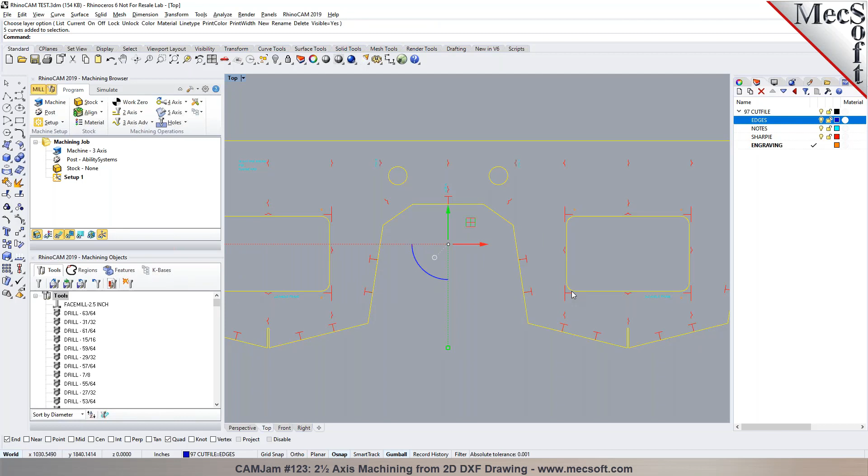I know people do like to center a tool path with offsets, and this is what the part needs to look like. So we have inside cuts and outside cuts only, and then we have the Sharpie lines.

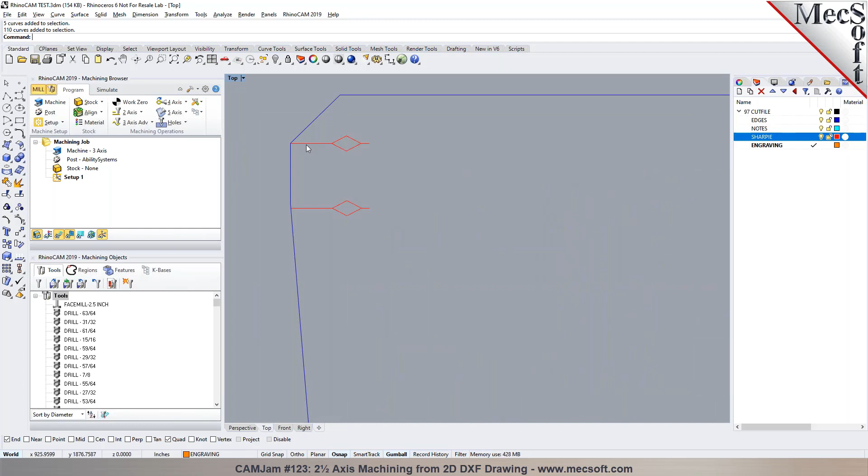I'm just hiding our GoToMeeting thing so I can see your screen here. So the Sharpie lines, those are what we actually do with a marker. That is a center tool path, lines that are drawn on there, or notations used on the shop floor that we draw on with a marker. And then the X is also drawn in with a marker.

You mean the engraving you're talking about right here? No, under notes. Okay, let me go to notes. Let me select the objects here. The cyan objects will actually be written in with the marker as well.

And then the engraving is just — Dakota, you could probably tell a little bit more about the depth of the tool used for that, but that's just a line, a circle that would be engraved into the plate. How deep do you...

It's just a 90-degree engraver at 0.015 depth. Okay, perfect, makes sense.

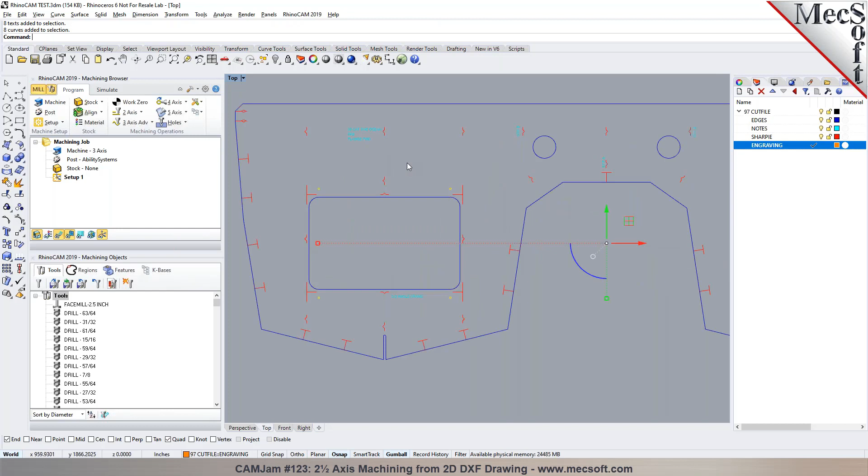So most of this would be like 2-axis or 2D milling, or 2.5-axis machining operations on this particular file, from what I can tell here. So all of our configurations offer 2-axis milling.

For parts similar to these, you can do a lot of automation. We have a feature called knowledge base, where we can save the entire workflow of operations to a knowledge base, and it can program it. You can set up rules even to automatically have the geometry selected for machining as well. I'll go through that as we go through the demo here. That's offered right from the standard configuration of our product, the knowledge base functionality.

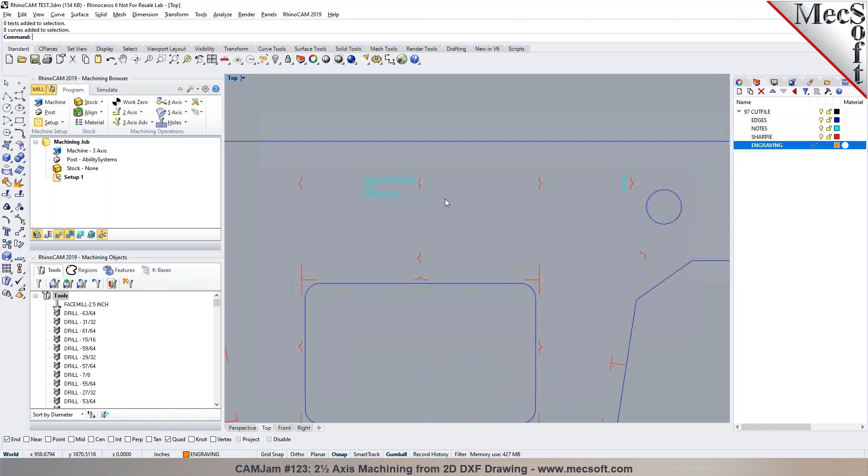So let's see how we'll go ahead and program this part in here. The first step is to go ahead and establish the XYZ orientation and where the origin is. If you take a look at the drawing here, it's somewhere way out in space right here, and your origin is right over here. You see that, sir?

So we want to get the part moved close to the origin. Also, you have some of these defined as text in here. You can see it's defined as text in Rhino as opposed to being vector geometry. So if you want to engrave them, you would need to convert them to vector geometry.

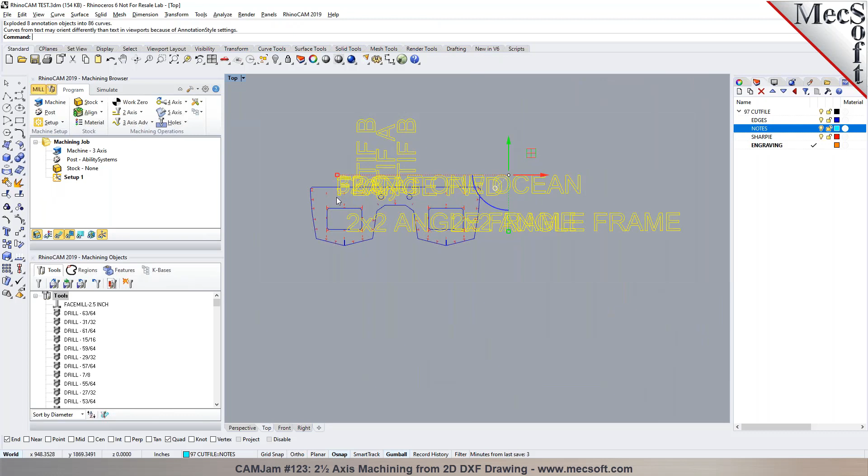So you can go ahead and click on notes, right click and say select objects. It'll pick all of them. And if you just do an explode command in Rhino, you'll notice it'll convert them to vectors. You see that right there? But it looks like there's some sort of an issue with the conversion itself.

Now, are these supposed to be in inches or millimeters? Do you know the drawing? That should all be in inches. Okay, so it looks like there's some sort of a scaling issue, or in the way this was created.

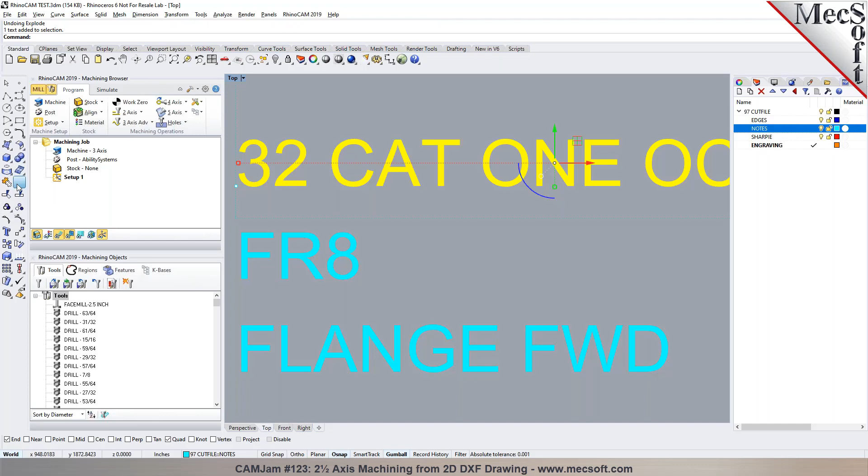So we may have to convert these to vectors and scale them down, because typically in Rhino, when you explode it, it should stay with the same height and letters text that you have. You can see when I explode it here, it kind of scales up right there. Yeah, I think I know why that is, but we can deal with that later. Okay, so you need to have it vectorized to be able to engrave, just letting you know.

So now let's go ahead and get these parts set up for machining. The first step is going into the RhinoCam machining browser. So when you go to RhinoCam and click Mill, it automatically displays your machining browser, which has two main tabs: the Program tab on the left, and the Simulate tab to the right. So your workflow is working through each of these groups as you go from left to right.

And then underneath this here is called the Machining Objects browser, which allows you to define tools. As you can see, I have a bunch of tools already preloaded. RhinoCam will load the last loaded tool library for you. So you can build your own library of tools and load it, or you can load the standard tool library as well.

And you can define tools as and when you want to add new tools to a library. We have different tool types we support, starting with ball mills, flat mills, corner radius, tools for engraving. You talked about a 90-degree cutter. So we put in the taper angle, which is half the included angle. If I put in 45, the total angle would be 90 degrees.

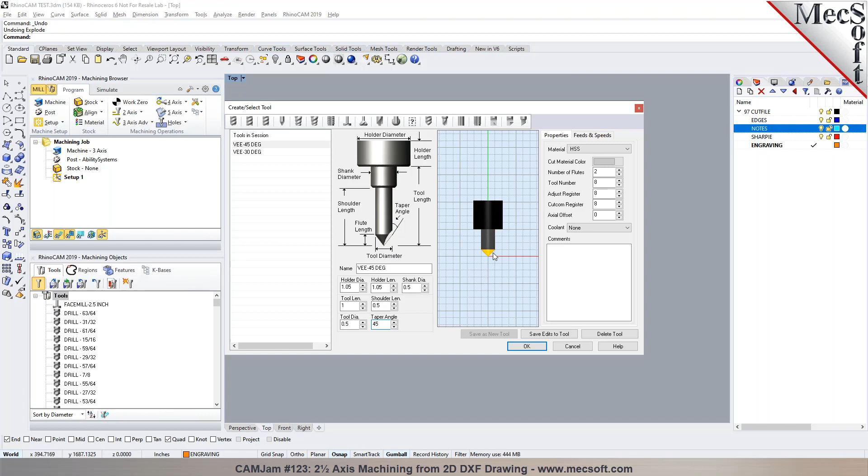You have chamfer tools, taper, thread mill, face mill cutters, dovetail tools, fillet mill tools, lollipop cutters. You can also create form tools. And of course, you have all the drill tool types: drill, center drill, reamer, tap, bore, reverse bore. And you can create tools.

You can define your tool numbers, establish the properties for the tool, and then also set feeds and speeds. You can also compute the feeds and speeds based on the material you're cutting, and the system can give you recommendations on the feeds and speeds to go with. And all of this can be saved to a library, so you don't have to go through the process of recreating the tools for each and every project you're working on.

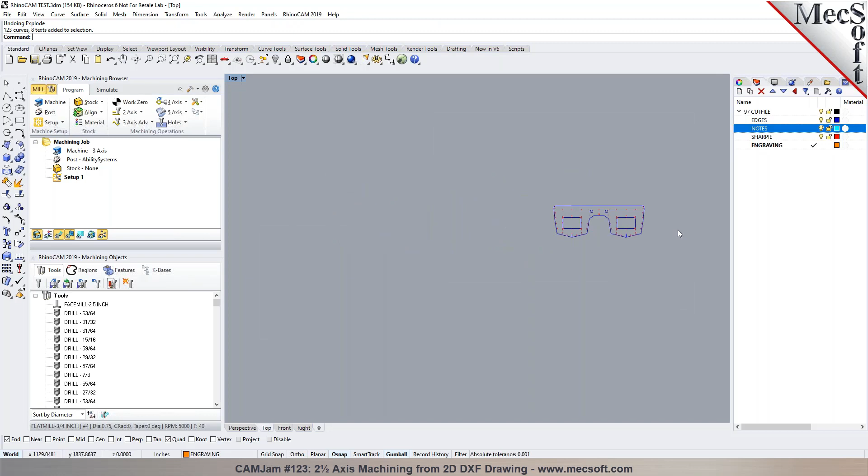Now, there are several ways you can establish the origin. One way is to basically move the origin to the origin in Rhino using the transform command. You could basically put a box around it and move it in Rhino, or you can use the tools that are available to you in RhinoCam to move it to the origin as well.

So the workflow here is go through the machine definition first. You specify the type of operation. For 2 and 3 axis, it's automatically set to 3 axis, so there's no additional parameter that you need to set in here. And then you go ahead and select the post processor. This would be the machine tool that you're going to be outputting the code for.

Do you happen to know the name of the machine or the controller that you need a post processor for? Are you talking about the multicam? It's a multicam. Okay, so yeah.

We can go through the list here. We have posts from multicam. I'm going to select one from the list. I also have a post that's called revision 1, where I made a few edits that'll output the M12 and M22. They have what's called a 3D device on and off. So that's included in the post right here.

And then you can set the output extension to be .cnc. You can just select add new and put in an extension .cnc. The extension will automatically stay right here. And there's your post processor.

So the next step is to create your stuff. Sorry, go ahead, I have a question. If our post processor does not show up on that list, how do we go about getting it on there?

We'll get you a post processor for the product. When you get the copy of RhinoCam, we'll have a post processor for you. Great, perfect. So we configure posts, we tweak posts, we edit posts for our customers all the time, so we can help you with it, not a problem.

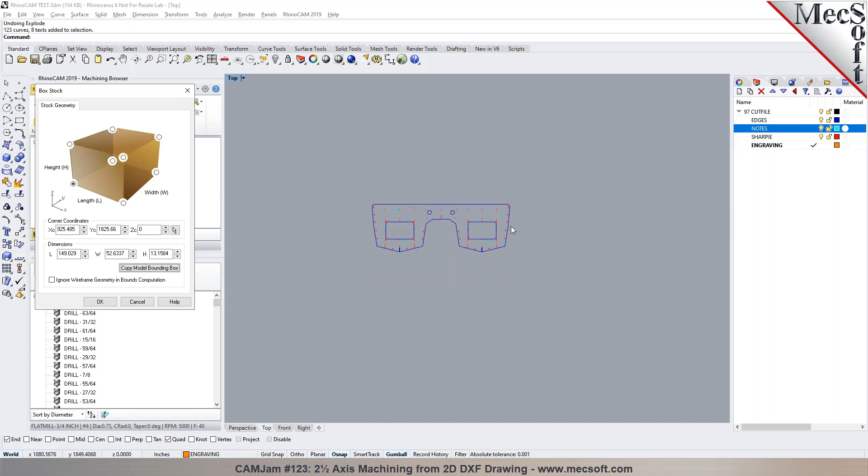So the next step is to define your stock. And when you click on copy model bounding box, it automatically computes the minimum size of stock that you need for this part right here. So now if you take a look at this drawing here, I can actually go ahead and move this to the origin if I would like to.

I could say align, set world, set to part, and I can choose what corner I want to put the zero at. So I can say I want to take the southwest corner, put it to the origin right there. So it's going to move everything except the text, as you noticed, because it's not a vector geometry, so it's going to leave the text there.

So for now, I'm just going to hide the notes layer. Would that be okay? Yeah, we're definitely going to need to sort that out because we need to know how that's going to work for us, and we would like your help on that.

You need to explode it to convert it into a vector geometry in Rhino. That's what we would have to do. One of the ways I could possibly try doing is using a command called duplicate face border in Rhino. Let's try that in here.

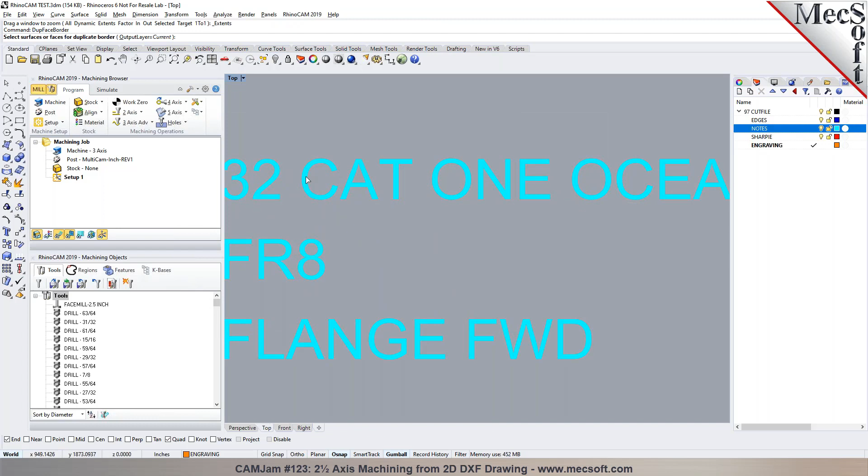Let me hide this information. So I can try using duplicate face border. Okay, so in order for me to explode this, do you know how this was created originally? It's just using the text command. Okay, so the explode command in Rhino, explode text.

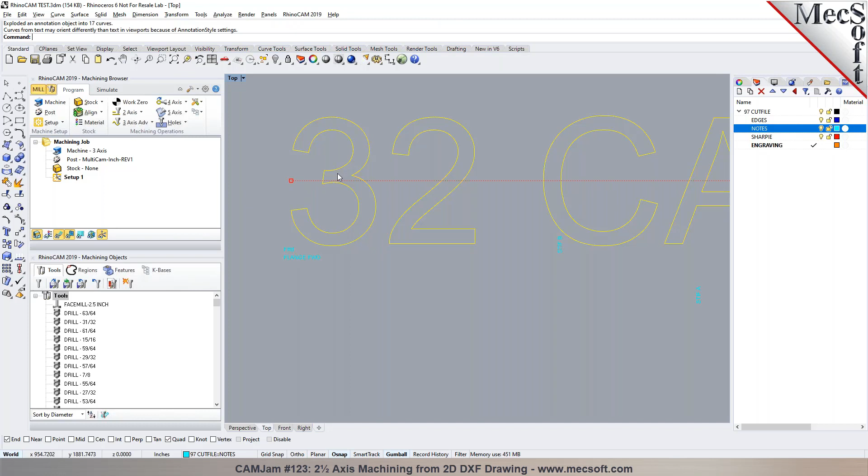See, the explode should do it, but for some reason it's scaling it up. We'll have to talk to McNeel to see how we can explode it without having to scale it. I have not noticed this on other text geometries, so I'm not sure why it's scaling it up. I'll have to check with McNeel.

But once you explode it, we can engrave these geometries. Yeah, because we want the text to be a single line. So if you want it to be a single line, we actually have a text option that can be created as a single line. We have a text for Rhino called a single stroke font, and let me show you how to do that here.

Yeah, so you created this as a text in here, right? You see the height, everything, it shows up right here. So rather than creating it as text over here this way, you need to create this as a text object. So you need to redraw it as a text object right in here.

And then you specify the text type. Type in the text. Rather than selecting them as is, you need to make sure you select them as curves. You select allow single stroke font, and then you basically pick the font in here.

We have a font called MecSoft font. You pick that, that's a single line font, and you select this and give it a height for the text. What is the height? Half an inch. 0.5. So you put in the height, and now when you create it...

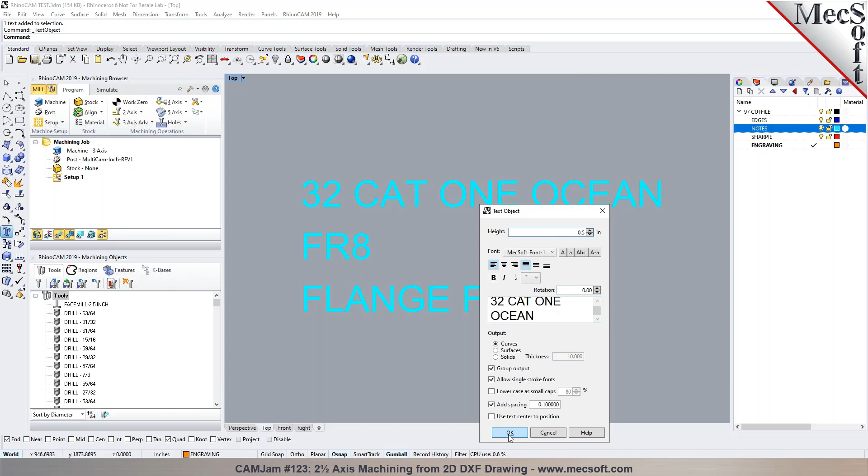You see it creates this one. It shows as a double line font right there. So let me go back and redo the text in here. You need to select the font as MecSoft font 1. And then you select allow single stroke fonts, and you'll now notice that it creates as a single line text.

So you would need to actually define these as a single line text, and then you can do an engraving with it, okay? So rather than creating it this way, this is a different type of text you created. So you need to change it to use the text object command in Rhino, and then you can create it as a single line text. Great, okay.

Thank you. So for now, I'm just going to skip the text, because we've discussed how we want to define them or create them in Rhino.

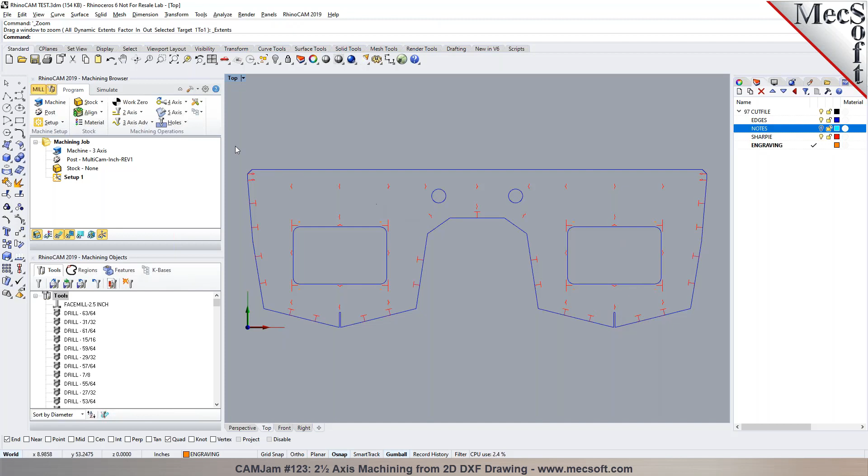So we got this in here, the geometry. The next step is we'll go ahead and build our stock. We'll say stock, and this gives you the length, width, and the height. Does that look right? The length and the width, 149 inches and 52 inches.

Okay, so I'll make it slightly larger. Maybe we'll go 150, and then we'll change it to maybe like 53 inches, or we can say 152, and then maybe 53 or 54 inches. And we'll give it a height - what would be the thickness that you want to use? 0.19. Okay, all right.

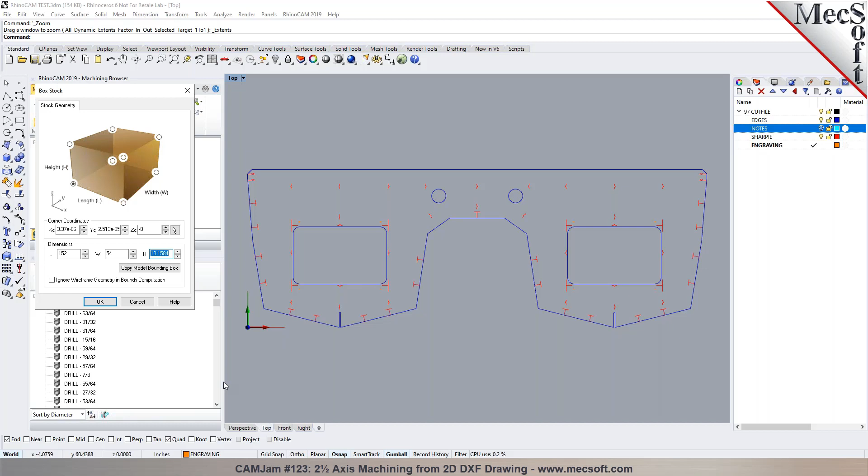We'll create the stock. As you see, the stock has been defined. The next step is we want to align the stock to the part. We would pick align, Z alignment. We want to have it flush to the top. So if you take a look at it here, you can see that the text is flush to the top, and then have it centered in X and Y.

Okay, so there's material being left all around the part, so we can go ahead and not leave any factory edge - we're going to machine it out.

So in the next step, we want to put in the 0, 0, 0. Where would you like to establish your XYZ origin? Where it's at, it's fine. Or do you want to move it to the corner of the stock material in here? Yeah, that's more preferable. Okay, so we'll do set world coordinates, set to stock, highest Z, southwest.

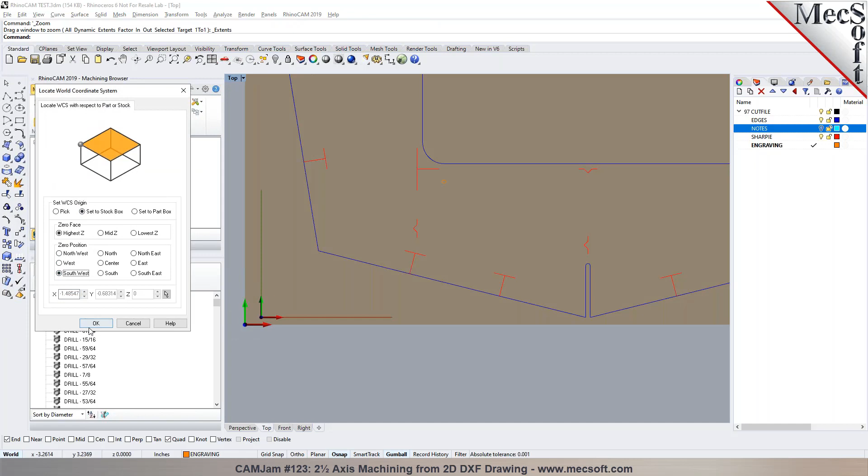So that basically puts your 0, 0, 0 to the top of your material in the Z, and then to the southwest corner, which is going to be your lower left corner for XY origin.

Now, if your router has more travel on the Y compared to X, then we would need to rotate the part out by 90 degrees. So in this case, we have assumed that we have more travel on the X. Correct. Okay, all right, so we got this set up in here.

The next step is to program our toolpaths. So you'd want to cut the inside of these two shapes, right? Yep. And then these as well? Yep. Okay, and then the outside of this particular shape. Yep.

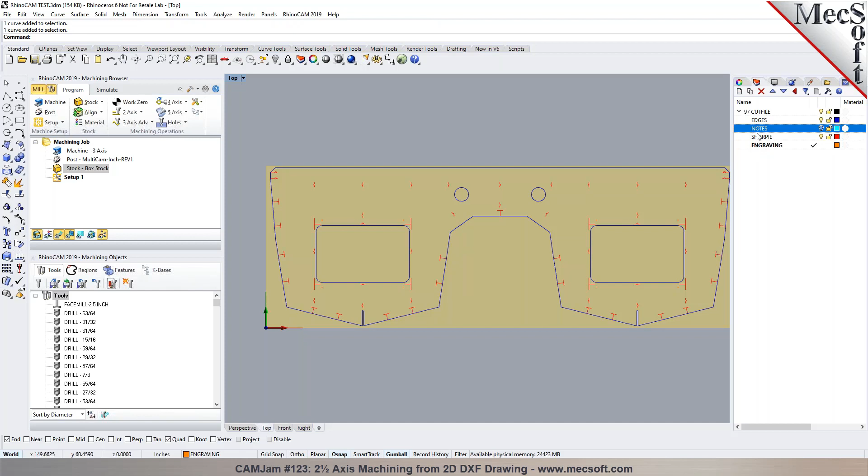All right, so what we can actually do is to make our selection process easier, the ones that you've defined here, you call them edges, right? Yep. So you can actually, if you wanted to just put them in different colors, we can change the colors in here. I can just right click and go to properties, and I can say this one, rather than by layer, I want to use a different color. I'll just pick green for our discussion here, okay?

Okay, so we're going to go in, say first we want to do a profile cut. We'll pick select curves. Now rather than having to go through the process of individually selecting them, I can use the select by color option in Rhino, and I can pick the target color as this one. It'll automatically pick all objects of that particular color. And then right click, so all 4 geometries are now selected.

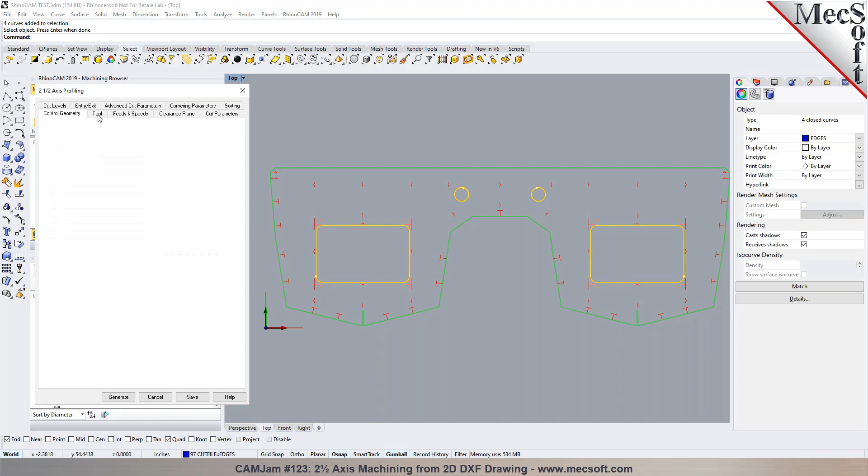I'm going to go pick a tool for it. What size cutter would you like me to use for the profiling? A half inch end mill? That's fine. I usually use a 3/8, but I don't. 3/8, okay, I'm going to go ahead and add a 3/8 in here. So I'll just change the tool name to 3/8.

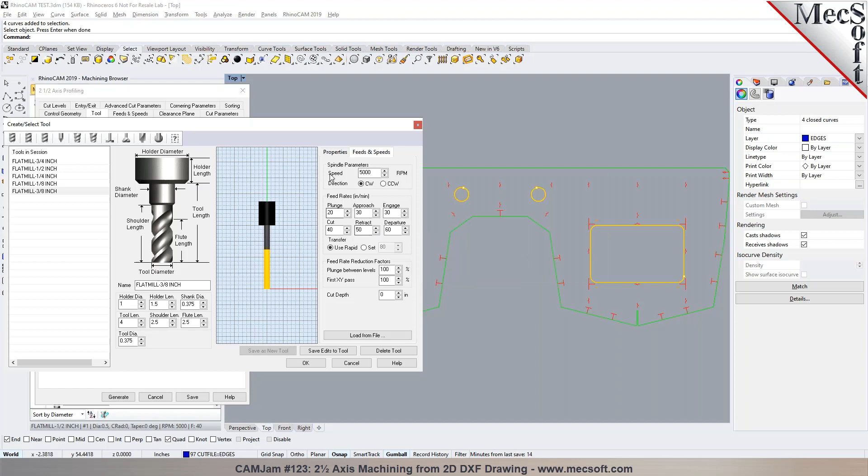I can then establish my tool number, feeds and speeds, save as new tool. It says tool number is being repeated, do you want to use a non-repeated tool? I can just say no for now. So tool number 1 is set to 3/8. So now I got the 3/8 tool in my library.

Feeds and speeds are being loaded from the tool. You can see that the clearance is set to automatic, so this is your safety plane for all your transfer motions. You can also change that. You can say go stock max plus maybe a half inch, for example, if you want to go half inch above the maximum height of the stock.

In the cutting, I could say I want to climb cut on the inside, and then in the cut levels tab, I can specify how deep I want to go. So your material is 0.19, right? You want to go maybe 10 thousandths deeper into your spoil board, or you can just say 0.19 or 0.2, for example. 0.2 is what I usually do.

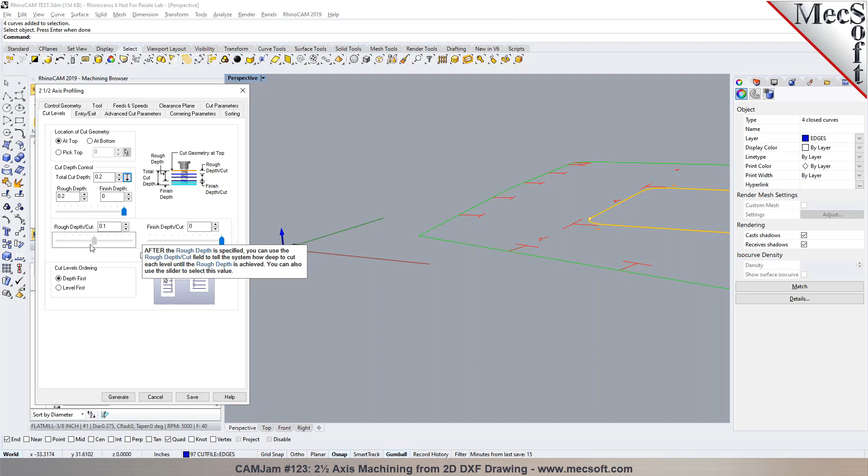And then you want to take it out in one cut, or you can break it up into like 2 cuts of 100 thousandths each. So you have the control right here. Okay, and then you can do entry and exits, how you want the cutter to lead in and lead out. If you just want to do a plunge, you set it to none, it'll just do a plunge cut. And then you can do any sorting and advanced cut parameters right in here. You can specify to do a sort based on minimum distance and then generate.

So this basically gives you your profile cut for the inside. So it's cutting the inside shapes right there. And let's go run a simulation. So I can go to the simulate tab, select the operation, and click on play, and that shows your material removal simulation, cut material simulation. You can see it's going down to the depth that you put in right there.

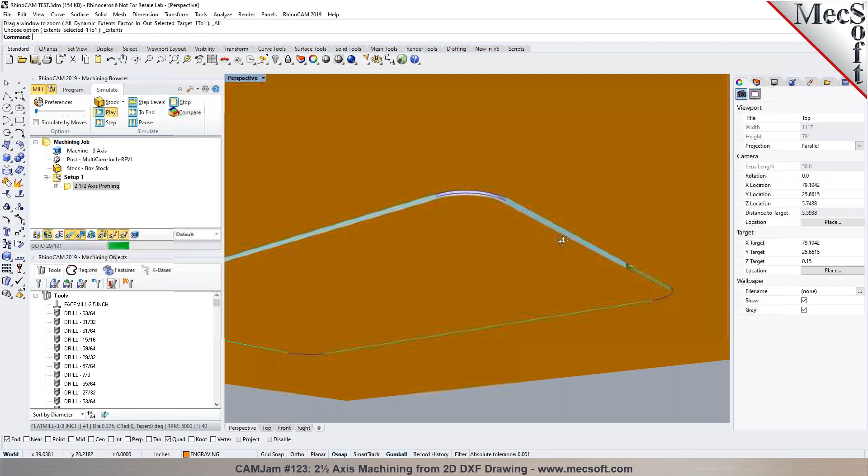If you want to do bridges and tabs, we can also do bridges and tabs so this piece doesn't fall apart. We can add a bridge so the part stays intact if you don't have a vacuum holding and you want to do it. You can also speed up your simulation right in here.

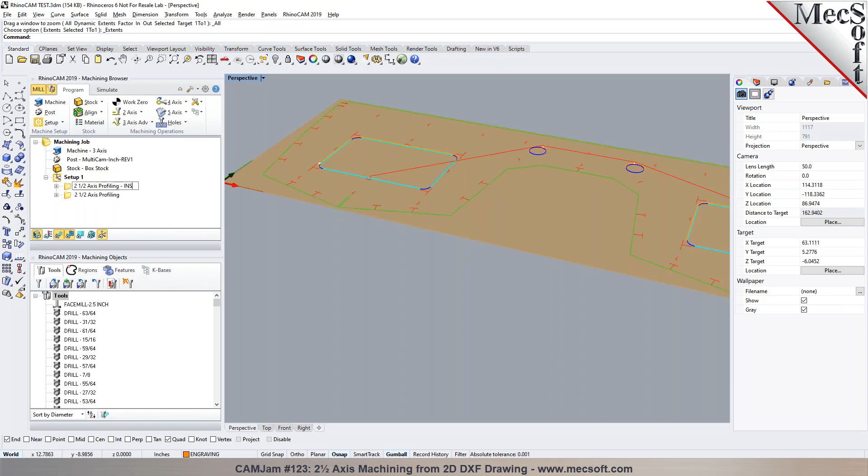Okay, so now that we did the profile for the inside, the process would be very similar for the outside in here, right? So I'm just going to make a copy of this. I could do right-click, copy and paste, or I can use just Control-C, copy, Control-V, paste. I'm going to rename this to inside, and I can rename the second one to outside.

And then I can double-click. All I'm doing is dropping the boundary I selected for the insides. Select curve edge - I can either select by color or select, it was just one geometry, just pick it right there. And I'm just switching from inside to outside here, and then generating it.

So all the other parameters stay the same. You can see if the cutter was too big, you wouldn't have been able to cut this feature in here. So it looks like the cutter is able to get in.

Okay, so doing it in 2 steps.

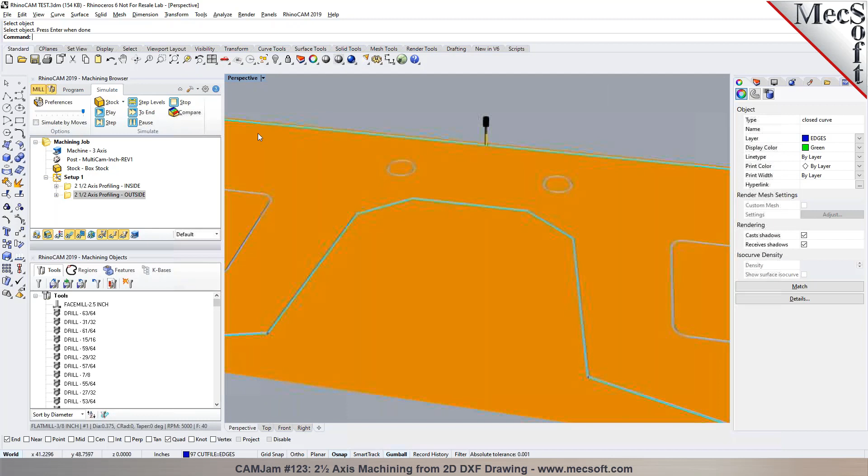Now, would you like to go ahead and engrave these letters in here, or the shapes that you have? Oh, they're Sharpie, but okay. And what kind of tool do you use? Like an engraving bit, like a V bit for the Sharpies? No, you literally use a Sharpie - it's a marker, it's like a drag diamond almost. Felt tip marker.

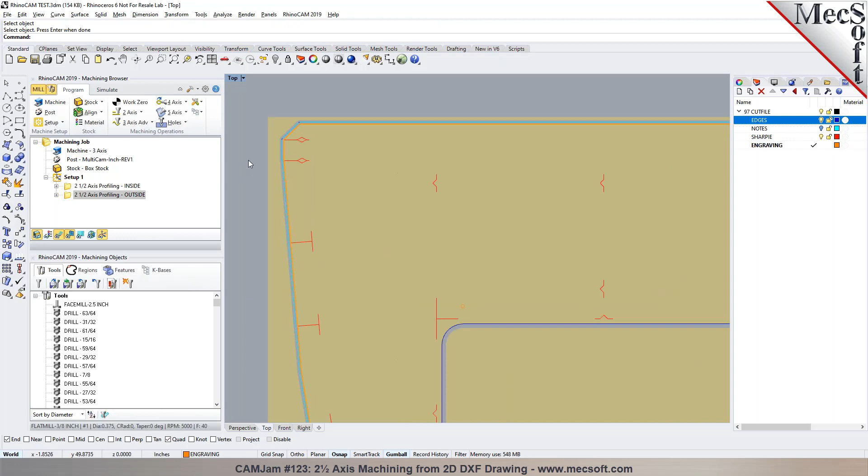So would it be using a milling operation that you would do for marking it, or is it something you do manually? No, it's a milling operation. You just set the depth to 0.015, 0 RPMs, and 1 pass. So we do an operation called engraving for that.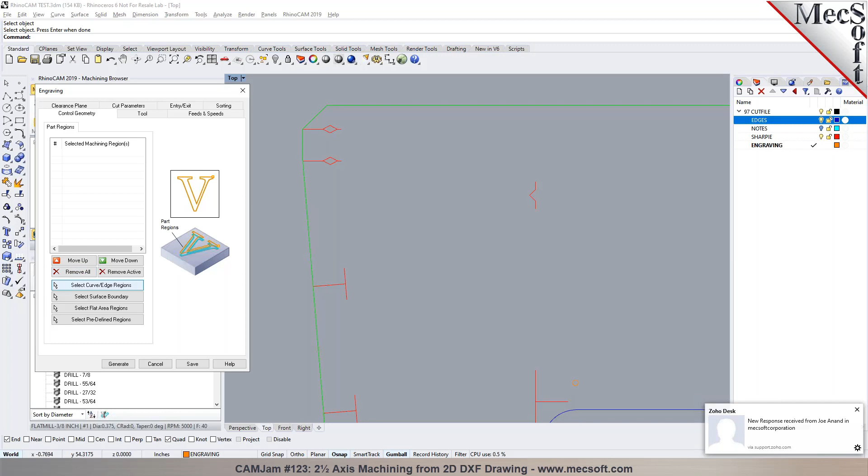And then we can select the geometries. Now I can either use select by color, or I can just go to the layer called Sharpie, right click and say select objects, and it picks all the objects that are on the layer. So you see how the selection process is much easier here - you don't have to go through a process of picking each of them individually. So now they're all selected.

You go to your tool, and here you can say you want to use an engraving bit, like a V bit. And we can put the tip to be like the taper angle - we can make something like a 5 degree, which looks like a pencil. Similar to that. So I can specify the tool length here - I can say it's going to be like 2 inches length. I can call this 5 degree.

You can specify the angle right there and do a save as new tool. Okay, it says my tool definition is not valid, so I got to change my shoulder length, right? I can set my shoulder length to be

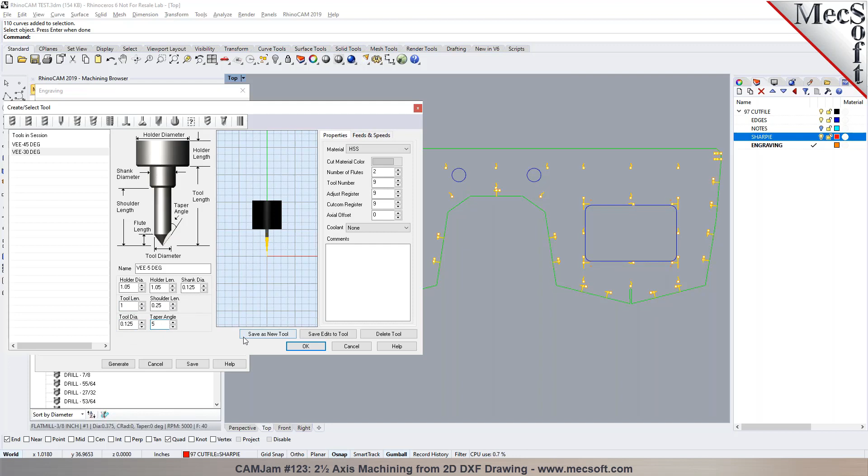just like 1/4 of an inch. So now the tool diameter would change. The taper angle is 5 degree. I'll do a save as new tool. So I got the tool defined.

In the cutting parameters, I specify how deep I want to cut. You said it's 0.015? Negative? Yeah, that works. Okay, so we just put in an absolute value - we don't put in a negative or a positive. The total depth would be determined based on where your 0 is, so it'll just go down to the specified depth. It's just an absolute value that you put in here.

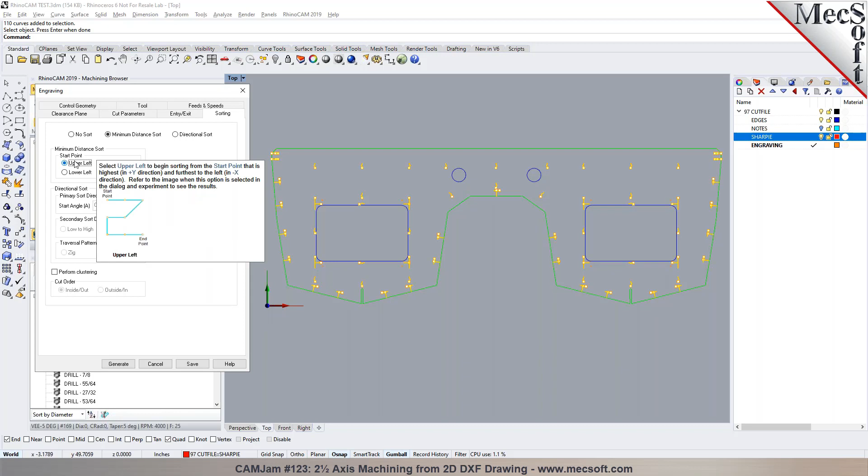Okay? Okay. And then you can specify your sorting - so sorted starting from the lower left corner, we can say upper left corner, and then generate. So that's going to give you an engraving path. And now I can make this my very first operation here, drag and drop it.

So you don't want the outside cutout to be done before you process that other information, right? Yeah. So it's going to go in and program that to the depth that you put in there. So what's that? Right? So you can see right there, it's going down to the depth that you put in.

So how did you specify a 0 rotation on that? Well, we got to specify in the post - we can say RPM as 0, we can put it in here. Speed, spindle RPM - we can set that to 0. Yeah, and that won't cause any issues. Well, it'll output a 0 RPM in the output.

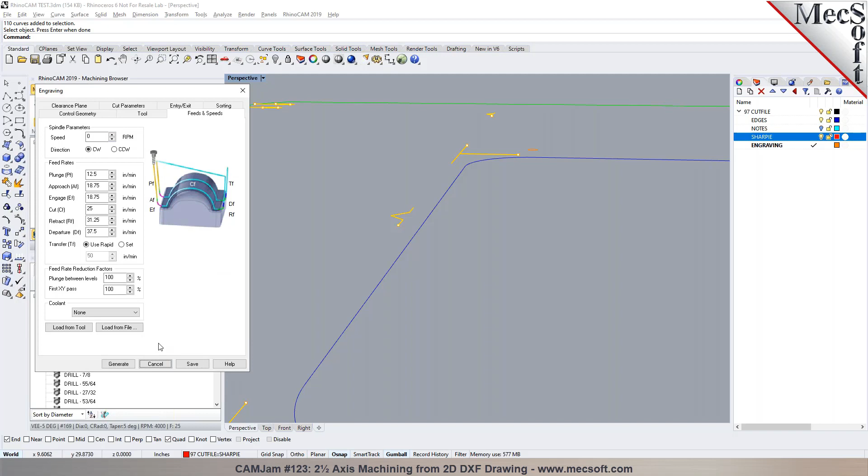Unless you can say, show me a posted code what the output needs to look like, I can take a look at the post. So if I post this out, it's going to output an RPM of 0 as the post is set up to 0 RPM. So you can see it says G97S0. Yeah, great, that's what we want.

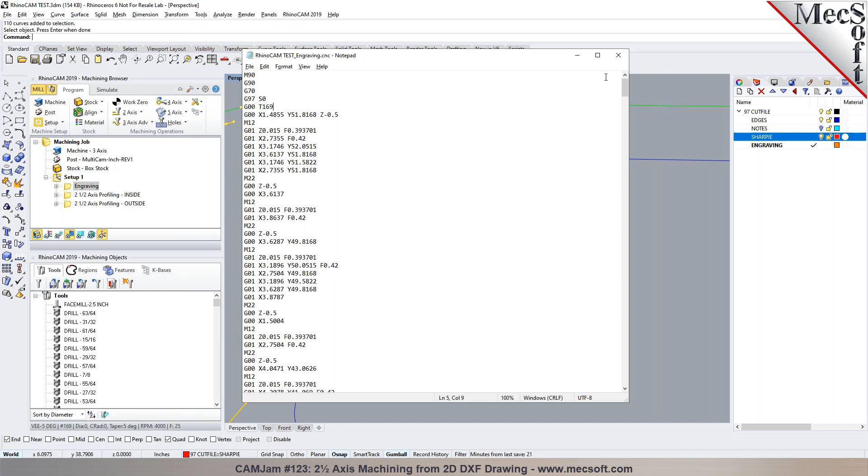Because it's literally a felt tip marker we're dragging across the material. Yes, I'm putting an S0 right here, spindle RPM, so whatever you program gets output right there. Great. Okay, and then the tool number I just left it at 169, whatever tool number you want to call it. Okay, so we got the Sharpie done.

Then the next thing is we want to do the engraving. So I'm going to repeat the same operation, copy, paste. And now I'm going to change these boundaries to the ones that are on this layer called engraving, select objects. And then we'll change the tool - you wanted to use the 90-degree cutter for that, so we'll pick the V-mill 90 degree. And then you can specify how deep you want to cut for these.

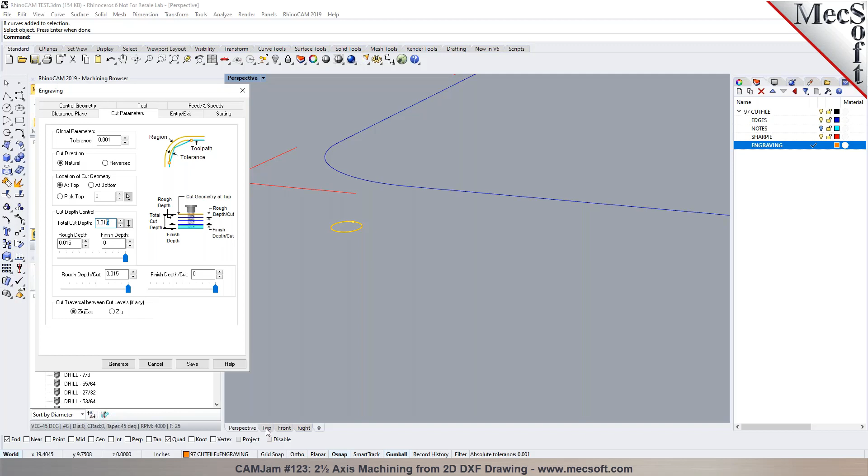So I haven't seen their start point or tool order or part order. Can you do that? Yeah, the start point basically automatically uses the start point of the geometry that you have in Rhino. Can you manually change it?

You can change it right here. You can use the command called curve seam in Rhino to move the start point around. So curve from objects, adjust closed curve seam. And you can actually drag the start point around. RhinoCAM automatically uses the start point of the curve for operations like engraving, profiling, chamfering.

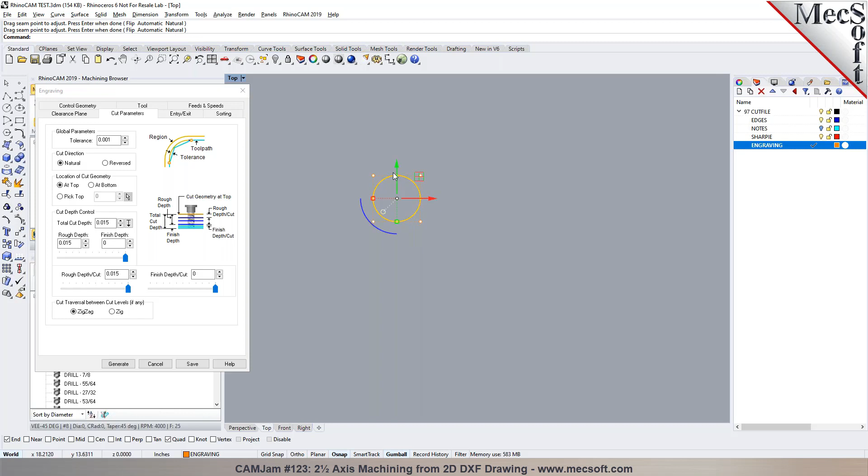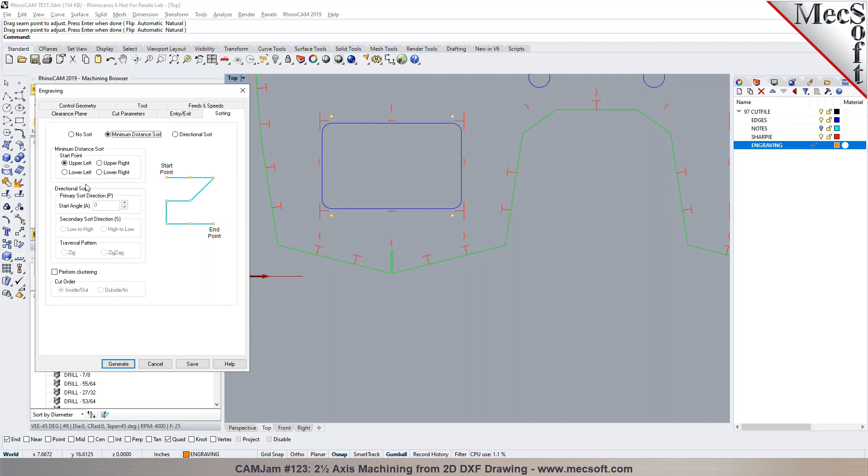And then the sorting - you asked me, I can choose how they want to start. If I pick no sort, it'll use the order in which you selected. If I pick sort from the lower left corner, it's picking from the lower left and trying to find the minimum distance. I can say go with a directional sort, and go with a zigzag from low to high. So it'll go all of these first, then come back this way.

What about manual, if you want to manually select? Manual is you set no sort, and then you pick the order in which you want them to be selected. So it'll prompt you to do that. When you say no sort and then generate it, it'll just engrave them in the order in which they were created or selected. So here you can see there's no sort order.

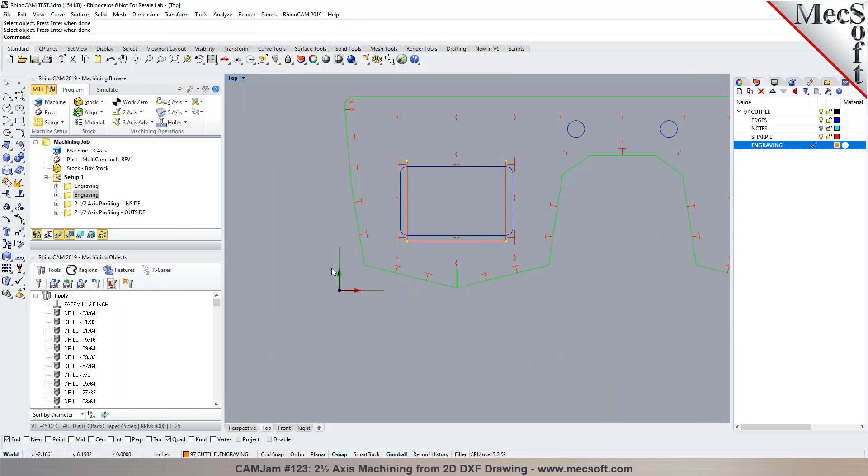I can go back in here, remove, and pick the order. So I can say I want to go 1, 2, 3, 4, and it'll basically use that order in which I selected it. So you select the parts in the order - I would just start by. So no sort will use the order in which you select it.

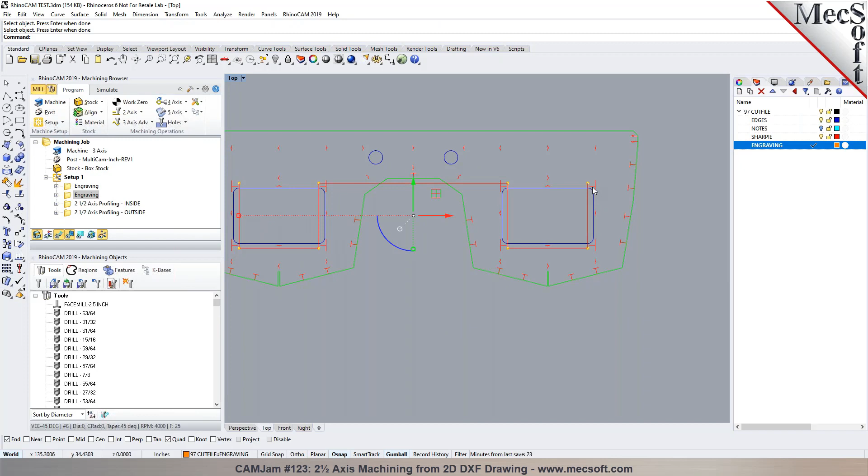But if you go ahead and say you want to do sort based on minimum distance, which means it'll automatically look at the start point of 2 or more geometries, and use a start point to define the sequence. And then again, I can run the simulation here.

So we got these operations simulated, and then we have the profile for the inside, profile for the outside. Based on the parameters we put in, like the feeds and speeds, all the information, you will notice that it gives you an estimated time for machining. Based on the feeds and speeds, you can see the engraving, the first one, is going to take about 25 minutes because I'm only going at 25 inches per minute.

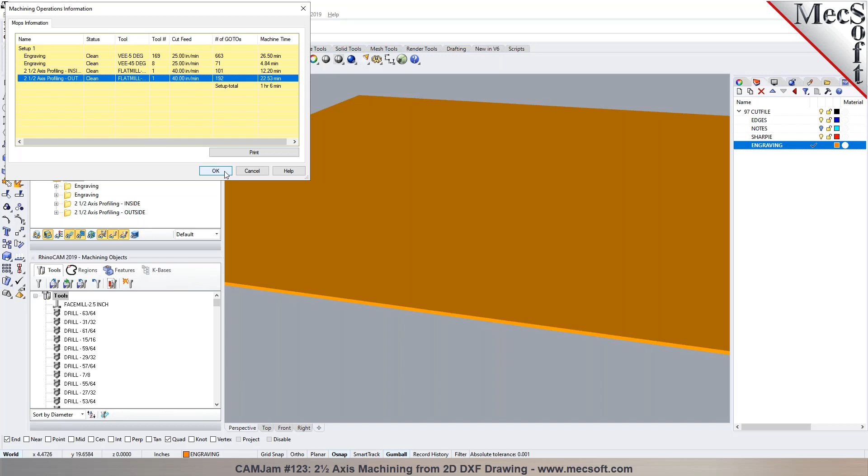And the last one, the profile cut outside, is going to take about 22 minutes if you're cutting at 40 inches per minute. You can always go back and update the feeds and speeds, and it'll update the estimated time for machining. So, another question - instead of doing a separate operation for inside and outside cuts, can you not have those on the same operation and just have your tool direction on the geometry itself?

Yes, we can do that. So what we look at is this - there's 2 choices in here. One of the options is in the cut parameters, we have cut side to be right side or left side of the curve. The other option is use outside or inside.

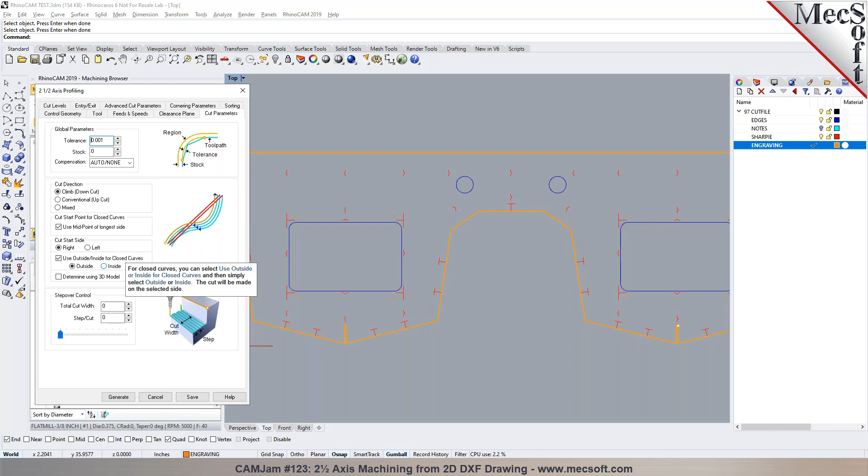So if you wanted to do it in one operation, we can take a look at the direction of this curve. If you look at the direction, this one is going counterclockwise, right? You see that? Okay, so we want to make sure that these ones are going clockwise, then we can program all of these in one operation.

So if these are, because you can choose cut right or left, then you can do right or left, and it'll basically keep the cut at the right side or the left side. So if I flip the direction of these, I'm going to flip these.

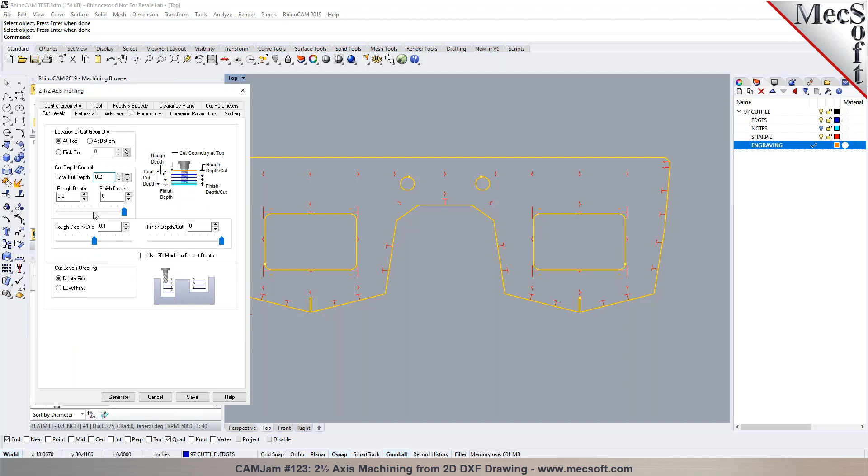So this one looks okay here. Now I can go back in here and make just one operation, and I can select all of these, and instead of using cut right or left, cut outside or inside, I'm going to choose cut start side to be right. So you'll now notice that it's cutting on the inside for these, and it goes on the outside for this one.

So if you choose cut right or left, can you zoom into the circles? Sure, I'll zoom in right here, just to the circle. Is that cutting? It looks like it's cutting on the outside. It's cutting on the inside of the circle. This is a geometry, this is a path, cutter path. Oh, okay, all right. This red line you're seeing is a transfer move, rapiding from one to the other. Yeah, so now if I go ahead and run a simulation here, you'll see it's cutting the inside of the circle.

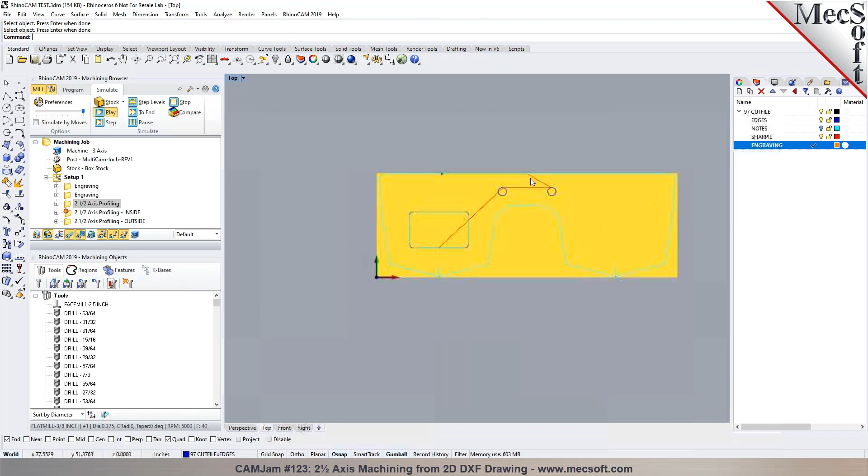So that's how you can. Yeah, so in our next version that's going to be released towards end of the year or early next year, we'll have an option to alternate between the directions. If you pick outside, it'll do the inside for this. So in 2019, we either look at the direction of the curve or we can pick outside or inside.

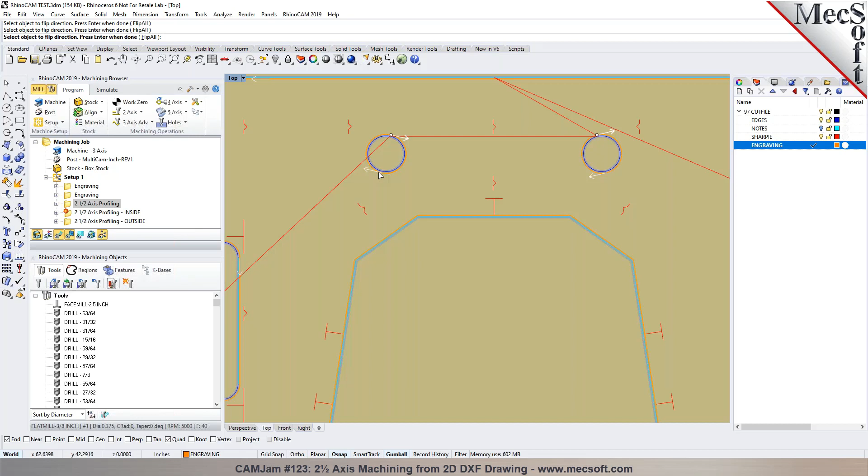So if you want to do both in one operation, then this is the way you can do it. You can reverse the direction of the inside curves to the outside curves, and you can do it in one operation. Do you know how to do that in Rhino? It's a command called Dir, Analyze Direction, and you can do a flip. So go to analyze direction. It'll ask you to select the object, and you can just do a flip all, or you can just click on individually, it'll let you flip it. Yeah, okay.

So now I can go ahead and delete these two operations out right here. Now it doesn't matter whether you program it as one operation or two operations. When you output it, the code is still going to be the same.

Well, my concern is I'm not cutting one part, I'm cutting 100, 200 parts per sheet, and I have a lot of inside-outside cuts, and I don't want to have a bunch of holes in my sheet, and then for doing inside cuts, and then try to do all my outside cuts in the next pass. You want to do it in one operation, inside and outside. Yeah, okay, all right, so I don't lose vacuum. Makes sense. Okay, so you can do it this way by using the direction, and you can flip it over.

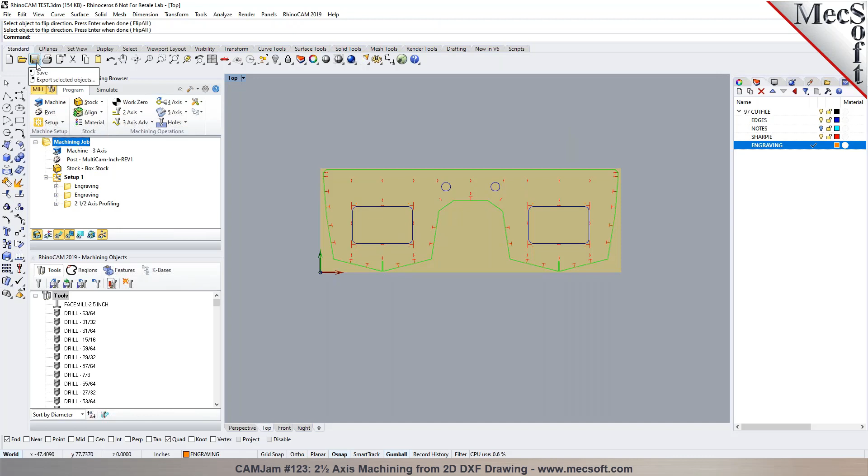Now, if you want to nest parts to a sheet, we have a nesting module that's included with RhinoCam. So you can nest multiple parts into a sheet using our nesting module. Can you show us how that works? Absolutely. Yeah, let me go ahead and save this out here. I'll just do an incremental save so I don't modify your original file.

Okay, so all of the CAM information that we programmed here is saved with it. Now, there's one thing I wanted to point out here before we do a nesting is, now these operations that we programmed in here, we can actually take all of these operations and then save this to a knowledge base. The knowledge base is considered like a template of operations. It has information about your tool, the feeds and speeds that we put in, the parameters that we put in, the cut depths, all of this can be saved. We can save all of this information into a knowledge base. So when you have parts that are similar to these, you want to program them, you don't have to go through the process of recreating the operations by going through the menu in here. You might just load the knowledge base and then basically program it.

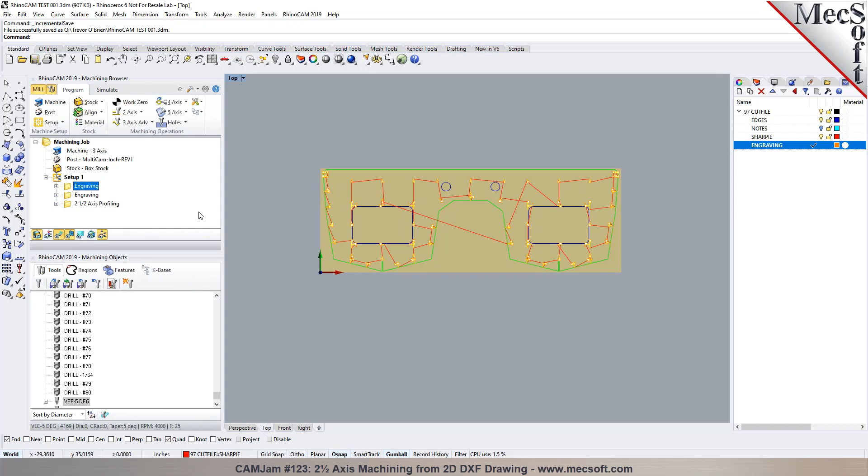Now we can go one step further by even making the selection of the geometries. We can automate it in a knowledge base. So one of the ways we can do that is by applying rules. So I'm going to go ahead and load the knowledge base in here. So let me go ahead and delete these operations that I had created. So consider that you just started out with this part and you want to program it. I'm going to set up rules in here.

For the first one, I'm going to say select all objects that are on layer. In this case, I'll pick the layer called Sharpie. For the next one, I'm going to say select all objects. I can either apply it based on a layer or based on a color. So in this case, I'm going to say apply for engraving. Then finally, I'm going to say for the profile, select all objects based on layer. Is it edges? Yep, right? I'll apply that right there. So now I have put in rules in here.

Let me save this out. I'm going to just call it with rules. Now I'll show you the difference. Now if I just go ahead and load my knowledge base, this one brings in all the operation parameters for you, but you can see there are no geometries being selected.

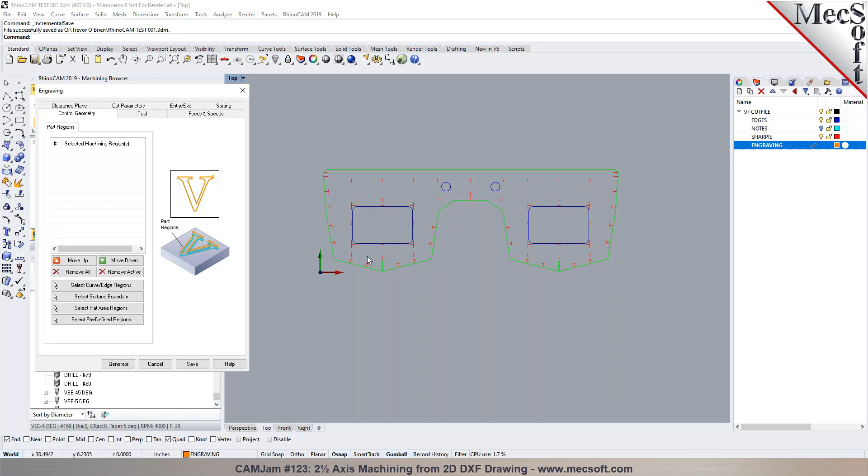You see that? It has all of your feeds and speeds and everything in here. But you got to go ahead and select curves, and you can either pick them graphically or use them by layer or by color.

Now, the one I created with the rules, I'm just going to go ahead and load the knowledge base with the rules on it. You'll now notice that the engraving automatically picks all of those geometries that were on the layer. So this is automation, and it comes right from our standard configuration. All I had to do was right-click and regenerate, and the toolpaths are now generated fully.

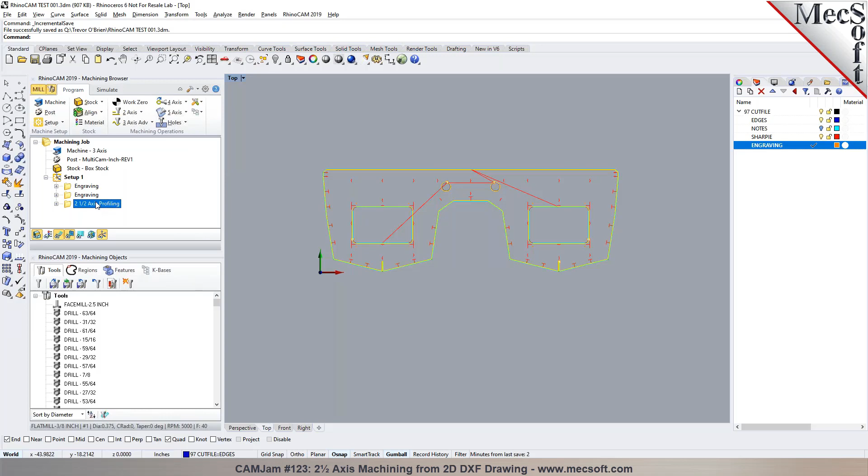I have a question. For the lefts and right, is there a way to build that into the knowledge base, maybe as a script, where it can select all of the items on the edges layer and then flip the directions accordingly?

That's something you can do in Rhino. Scripting is available in Rhino. There's no scripting built into the CAM - we use knowledge bases in the CAM part of it. So in Rhino, you'll be able to script it, and you can probably talk to Rhino folks, and they can tell you how you can have the direction for the outside and the inside in opposite directions.

Great. So do you see the power of the knowledge base right in here? This is how we were able to make the selection, and this is available right from our standard configuration. That could come in handy.

So I see that you already are structuring your objects on different layers. You've done the groundwork here, so that's just an extension of that into the machining.

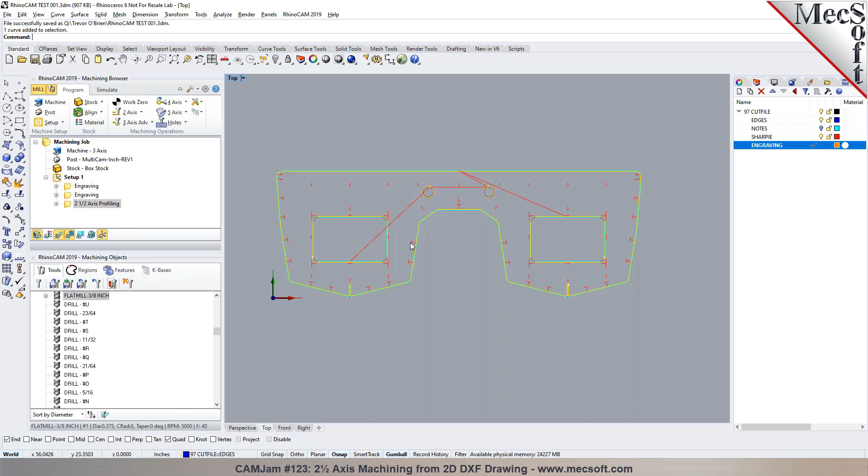Okay, let me back up and recap to make sure I'm hearing you properly. So you could open a Rhino file, and then when you go in and insert the knowledge base, you load it, and it will automatically put the proper items onto the proper tool pathing. Yes, that's right.

So basically what we did was we first programmed one of the parts, and then we established rules, as you see it. We said for the engraving, the selection rules are based on objects that are on layer Sharpie. For this second engraving operation, we said select all objects on layer engraving. And for the final one, we said select all objects on layer edges.

So this information for selecting the objects or geometries for machining is now saved in the knowledge base. When you open up a new file, it could be any shape that you're cutting - all you do is open the file, define your stock, and load the knowledge base. Now stock is mainly used for simulation; you really don't have to create a stock in here.

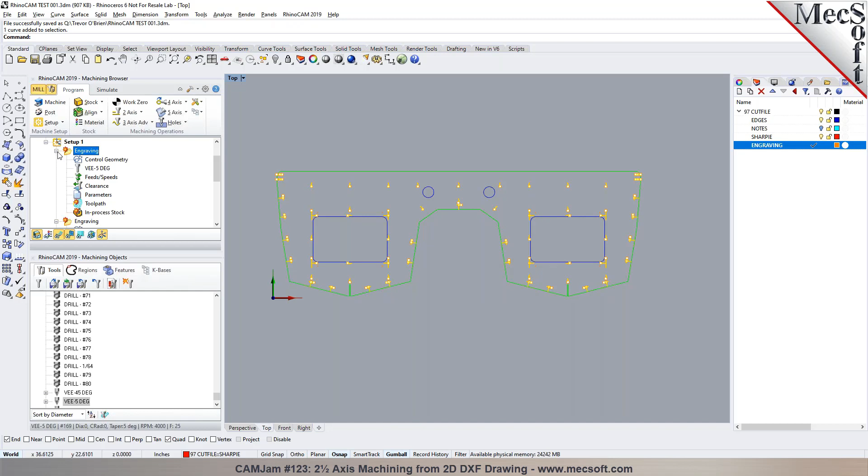You just load the knowledge base, and once it's loaded, if you select the operation, you see the geometries are automatically highlighted. If the geometries of the layer do not exist, then it's not going to be able to select anything in here. You like that?

This is available right from our standard configuration. This is like steps for automation, automating your workflow. That's great - all you do is generate. Now you can set it up, and the person who's going to be doing this, all he has to do is just a few button clicks to do it.

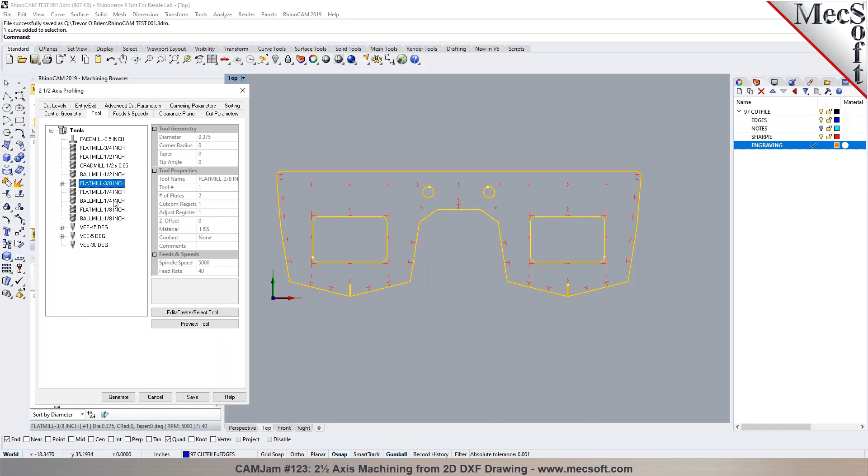So you have built the intelligence in here. You define the tool for it, you set your feeds and speeds, clearance - all of this information is built in here.

That's great. Okay, now let's look at nesting. Any questions so far?

Is there pocketing and whatnot? I haven't seen that. Yep, we have pocket operations in 2-axis. We have profiling, engraving, V-carving, slot machining, chamfer, filleting, hole pocketing, hole profiling, thread milling, T-slot machining.

The remachining is offered only in the Pro. All of the methods that you see here, from roughing to knife cutting, is available right from the standard configuration, and you get 3-axis machining. There are 5 different methods: roughing, parallel finishing, horizontal which is like Z-level finishing, radial and spiral machining. These are included in standard, plus you get hole machining, drill, tap, bore, and reverse bore with the standard.

Now we actually have a feature list. If you just go to help, either within the product or go to configurations, and I'm going to expand the list here, you'll see the methods that are offered in each configuration.

So we're probably looking at the standard. What's the standard cost again? Okay, I will certainly get that information to you.

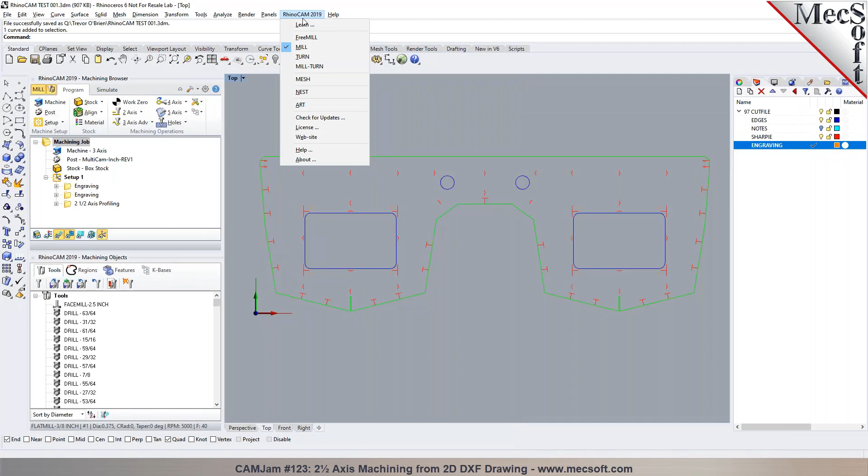And then go to standard. So the standard pricing you'll find right here.

And then if you do not have a copy of Rhino, you can get Rhino 6 right here. And then we recommend adding the annual maintenance subscription, which not only gives you premium support where we can log in to help you troubleshoot it, it also gives you access to monthly webinars, access to what's called a CAMJam video guide, and it'll include the 2020 version upgrade.

So, can you go back one page? Sure, please. Do you seeing what you've seen here, would the Mill Express work for us?

Well, the Mill Express does not include knowledge bases. The version that includes knowledge bases is the standard. The Mill Express includes 2-axis facing, pocketing, profiling, and engraving. The toolpath methods are included, but the knowledge base functionality is only offered from the standard configuration. So the answer is you could do it, but then you wouldn't be able to automate your workflow.

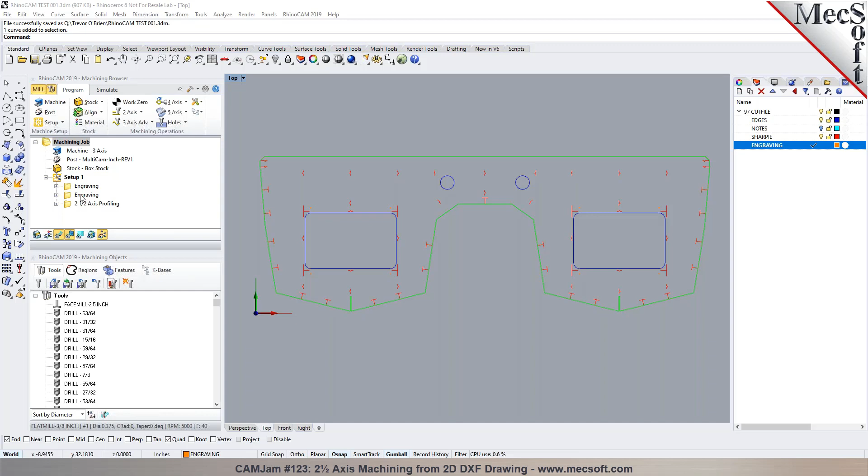Okay, great. Thank you, that answered it. All right, so let's look at the nesting module. I'm just going to go from RhinoCAM MILL to NEST.

And we have 2 different types of nesting here, true shape and rectangular. So true shape basically inherits the true shape of the object, and it'll nest them in here. Now you can specify and select the sheet.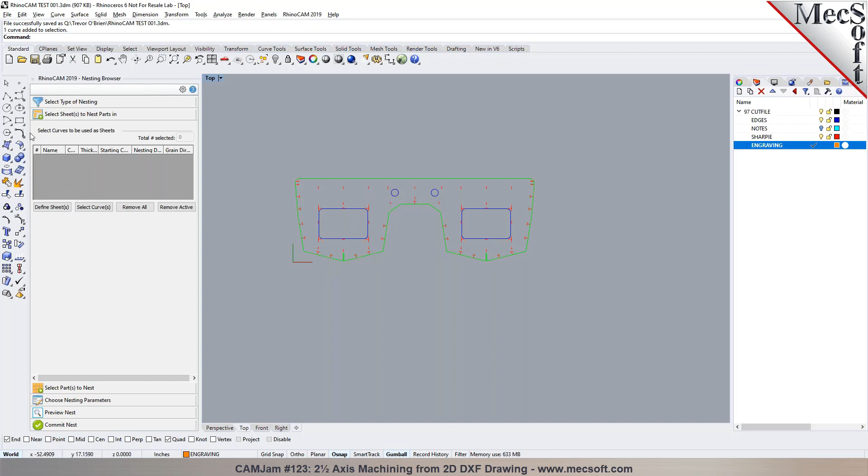So you can either draw a sheet in here. For example, I can say my sheet size, I can just go ahead and type in 00. Then I can specify how big the sheet is going to be, right? Do you happen to know the approximate size of your sheet? Is it 5 by 10 or 4 by 8? 20 by 6 — 20 inches or 20 feet? 20 feet. 240 by 72.

Okay, right, so we got this in here, and now I can select curve, and I can just grab this as my sheet. Then I can go to select parts to nest, select the parts. Once you establish all the direction, everything in here, RhinoCam will maintain that when you nest it. So you can see it shows there's one part and so many holes right here. And then I can specify how many to nest — so for example, if I put in, let's say, 4 of these.

Okay, I can specify the orientation step. You can choose any orientation — right now it's set to 90 degrees, but you can put in any orientation, maybe 15 degrees or 20 degrees or 45, any orientation, you can nest it in here. You can choose the nesting parameters, distance between part to part, you can set it right here. You can say the tool is going to be 3/8, so I can say half an inch. And then distance from the edge of the sheet to the part, I can say leave 100 thousandths.

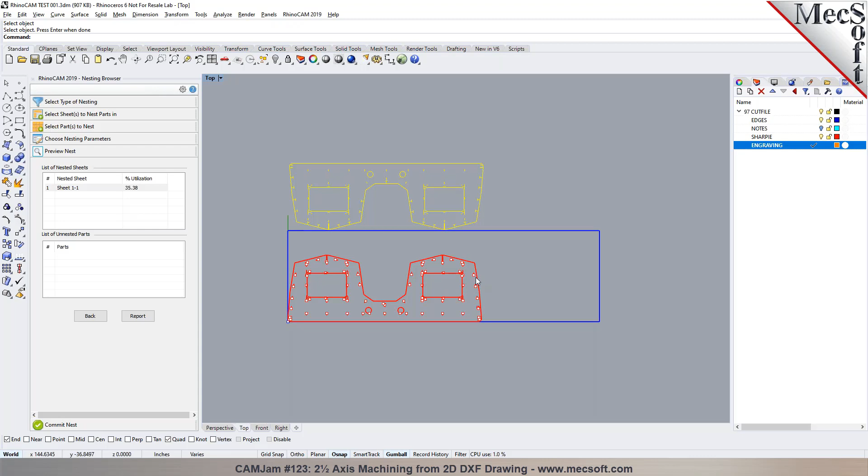And then when I say execute nest, you can see there's only one part it can fit in here, right? Yeah, so if we make the sheet bigger, we can probably fit more parts into it. So if you go back in here and say estimate number of sheets, it'll tell me I need 4 sheets to fill this job. Okay, so I can say update the sheet count, and I can also say place it along X or along Y, and specify the spacing.

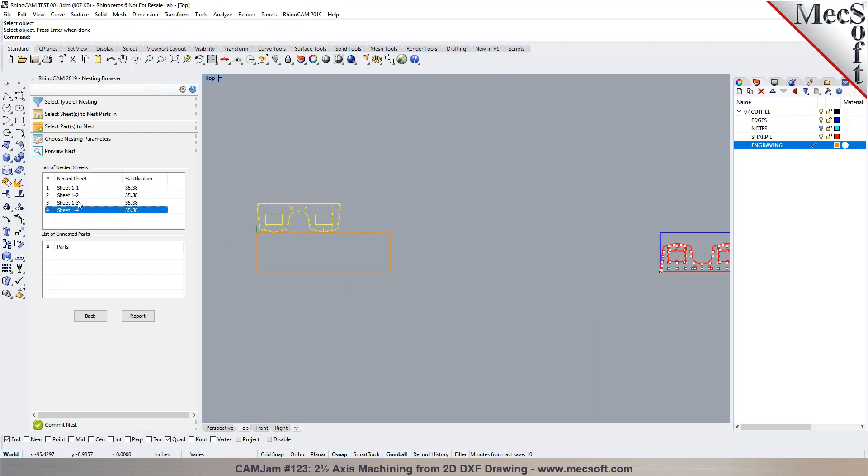So basically you have sheets 1, 2, 3, and 4. And then when I hit commit nest, it's going to output them as layers for each sheet — basically one layer per sheet. And then we can automate the programming again, and you can see it maintained the same colors, so you can automate it.

So the nesting comes included. Why did it keep the original up on the top? Well, we don't delete the original, so you can actually output these as separate layers. That's one of the options we have — we can export each sheet to a separate Rhino file if you want to do it that way. Typically we don't remove the original part, so you can just go ahead and hide it in here.

So we do not delete the original part, we leave it in the original location and placement the way you have it. You could do it in each file — yeah, you can export each sheet as a separate file. So there's an option here, you just need to give it a folder path, and then when you click export, it'll export each sheet as a separate Rhino 3DM file.

Do you have a more complicated nesting example you could show us? Absolutely, I can go through that here. Give me just one moment.

Let me try to look for something here. One moment, please. Yeah, no worries. Take your time. Any other questions here?

No, not really. I don't know. Okay.

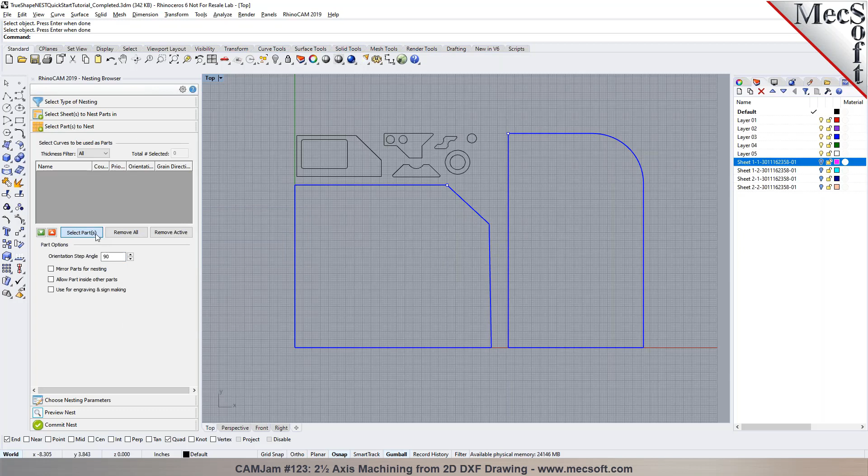And then you go to select parts to nest. You can click on select parts, and you can see it automatically groups the part and the hole.

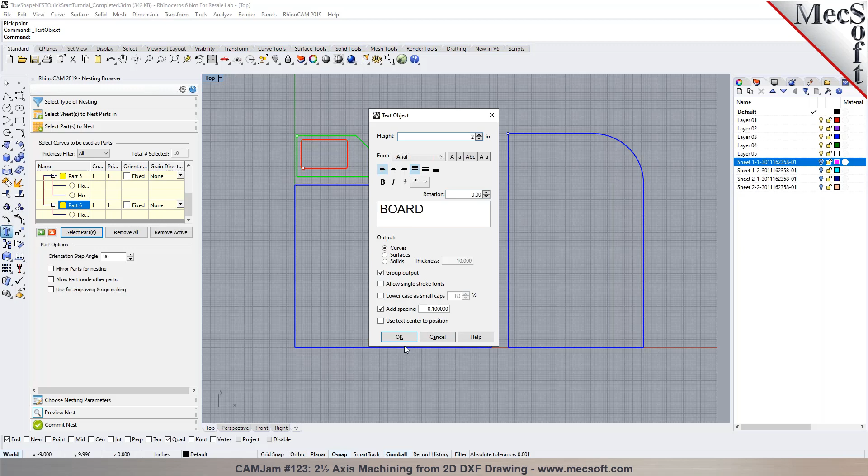Then let's say you had something like some text in here. Let me change the font to Arial. Let's consider—okay, that's a little too small. I'll change the height of the text to maybe 2 inches. I'll use grid snap to place it right in here.

I'm going to throw in a rectangle around this, so consider that I would like to nest these parts as well. Typically in nesting, there's only one layer—it's a part and this is a hole, right? Now everything inside this would not be considered the same unless you select the checkbox for 'use for engraving and sign making.'

For example, if I go back and select all of these, you'll notice it creates so many different parts—13 parts in here. But when I select 'use for sign making and engraving,' it'll treat everything on this particular part inside of this as one entity. So it changes the behavior to parent and child.

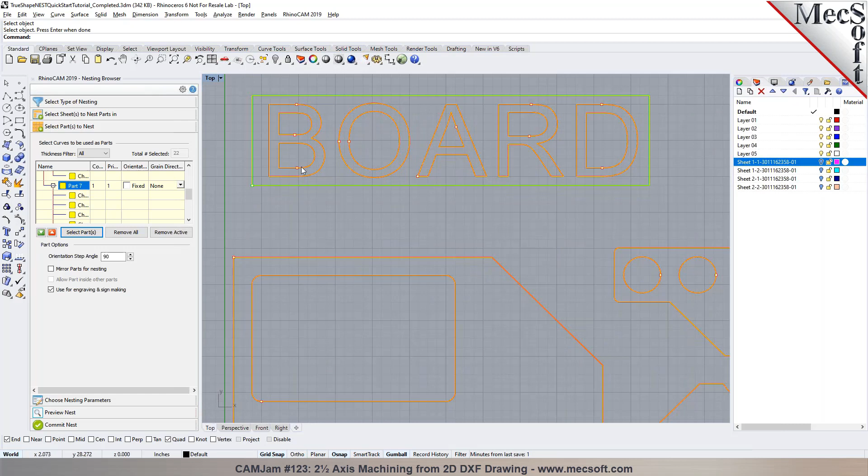So anything inside the outermost shape will be treated to maintain the same uniformity. So if you have some text that you need to do, you can specify it. You can also put in the quantity of each part—select them and enter the count. You can also set a priority for it, so if this part needs to be nested before the other parts, you can put the priority as 1. As the numbers go up, the priority drops.

And you can also say, for example, you want to make 5 of these and have all parts at a quantity of 5. You don't have to go and enter 5 for each—right-click and say 'make all the same,' and it'll set all the parts to a count of 5. But the priority is still 1.

You can specify the angle—I can say any 15-degree orientation. You can allow mirroring of parts. Now you can say execute the nest, and you can see it's executing the nest right there.

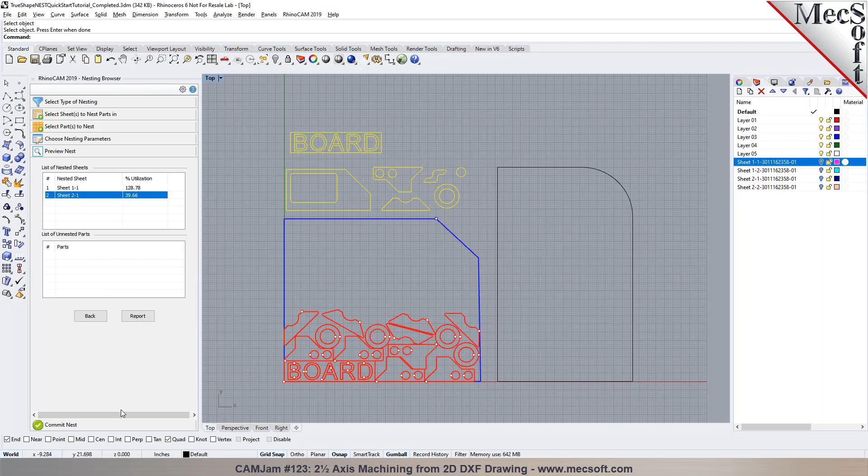I pulled it into the sheet, and I can do a commit nest, or I can give it a folder and export it to a path.

Now I can go back here and change the quantity. For example, on this one I could say I want to go 25, and this part I can change it to 15 or 50. Then I just go back and say execute the nest.

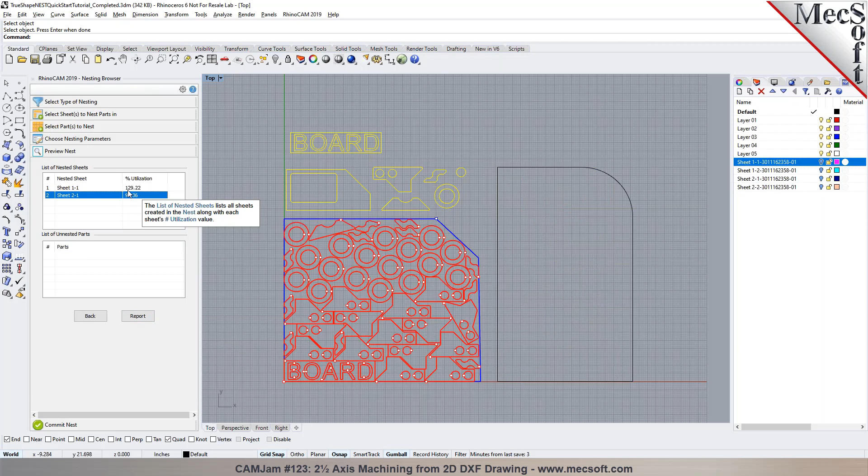You can see right there. Okay, and then you just basically go ahead and do a commit nest—it'll put it on the same layers. Where would it tell you?

So can you go back to changing the numbers and make one of them like 100? Okay, and then execute nest—I just want to see what it tells you.

Yeah, so if you go to report, it'll tell you the quantity of each part. You can see that it was not able to nest all of the parts—there's only 5 and 8, a total of 13 of part 1 that was nested, right?

Okay, and then it will show you how many sheets are required—you just go back and say estimate number of sheets. So it'll tell you that if you use sheet 1, you need 3 of them. So you can say update sheet count.

So now if I say execute nest, you'll see that everything is going on one sheet right there. And then if you do a report, if you add these up, it makes it to 100.

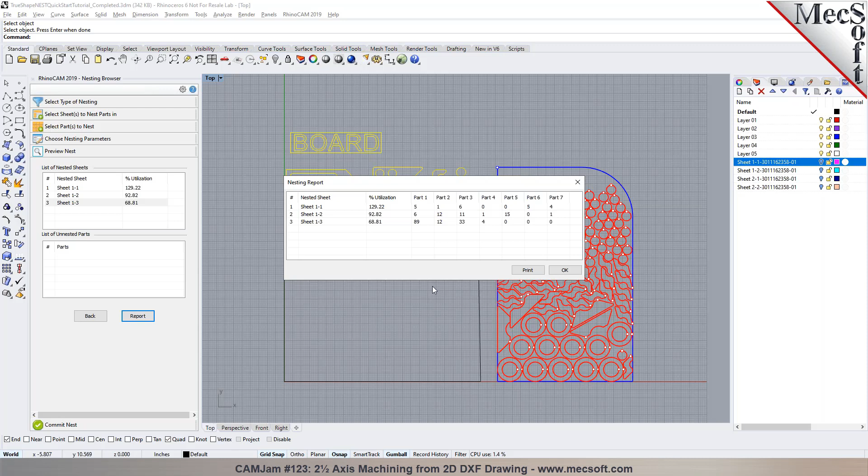Can you show the rest of the sheets? Yeah, right here - sheet 1, sheet 2, sheet 3. So I put them to stack, they're stacked right on top of one another. If I go back in here I can say I want to put them along X, give it a spacing, and now you can see they're laid out side by side. Okay, I see.

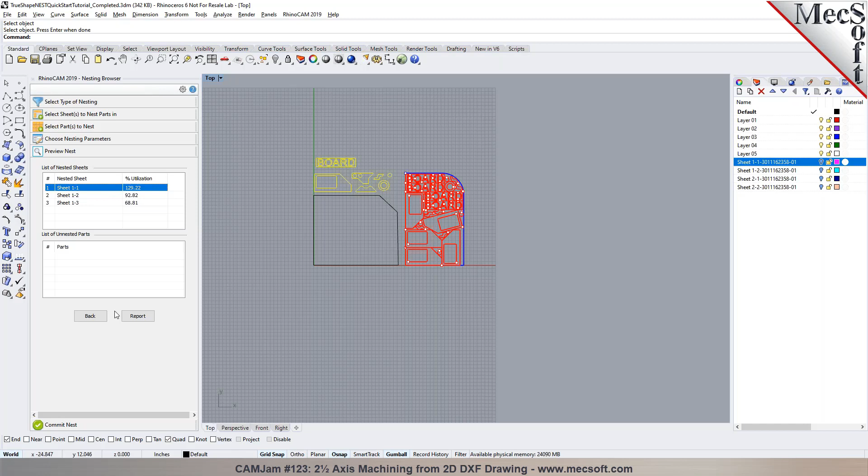There's no dialog box that pops up to tell you that you didn't get all of your parts on the one sheet. If the parts were not nested at all, it'll list up right here under unnested parts. But if it only nested, say, 20 out of 25 parts, then you've got to go into the report to see it. If it doesn't nest them all, it'll show up there.

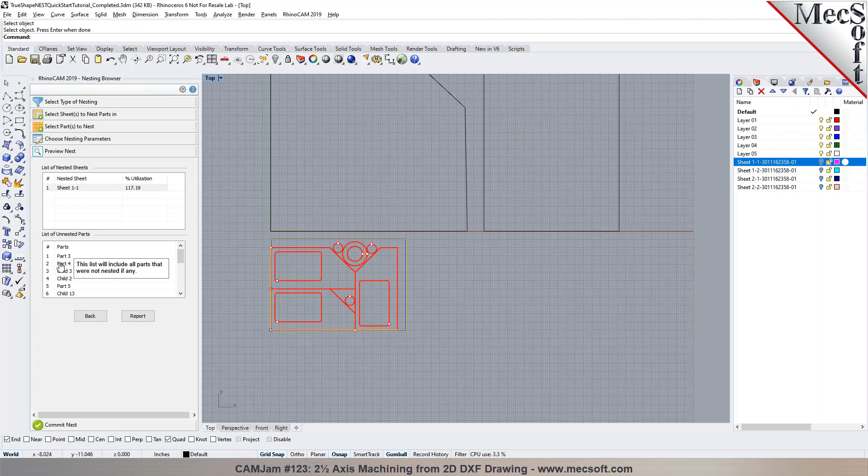So for example, if I draw a sheet right here, let me throw in something. Okay, now let me go back, remove all, select curves. So now you'll see these are the parts that never got nested in here - they were never able to fit in, right? Got it, okay, thank you.

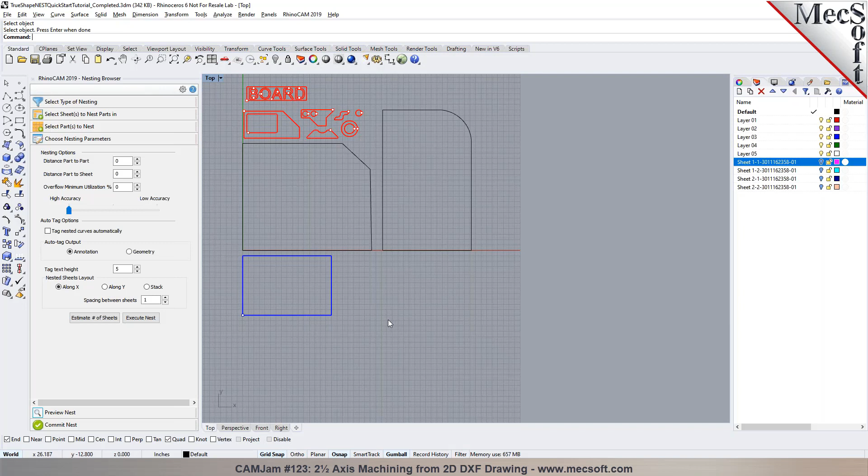I did just think of another question - can you show us how this will integrate into our machine? Okay, well let's go back into the file we were working on earlier. What do you mean, like when you run it, this one's - yeah, so what you do is you do a post process from RhinoCAM like we did earlier. So that's your posted code right here.

You take this and transfer it to your Multicam software interface. If the Multicam software is on a different machine, if the computer is on a network, you just put it on a shared folder and access the CNC file on the computer, or you transfer it via an external drive like a USB flash drive or jump drive. You just transfer it - Dakota's here nodding, he's understanding it, he's got it. All right, so it's as simple as that. All we output is the output file. It's an NC file, a text file format, so you can copy it from your desktop or any folder out to your CNC machine.

So if you guys have to do any work with us to get us to talk to the Multicam 5000, is that an additional charge, or does that come with the package? The post processor would be included with the product. We have the post pretty well ironed out - we have customers using our product with Multicam CNC. So we'll get you the post, and if there are any changes or tweaks you need us to help with, we can certainly do that. That will be part of support.